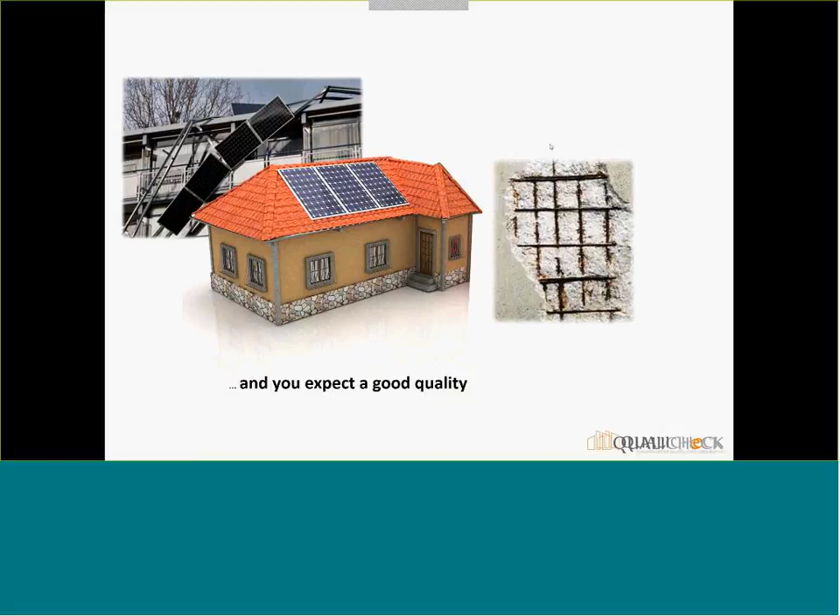It started in 2006 with level 100, and you see that in 2021, when the NZEB level has to be reached, the forecast is that it will be requirement E30. So only 30% of what was allowed in 2006.

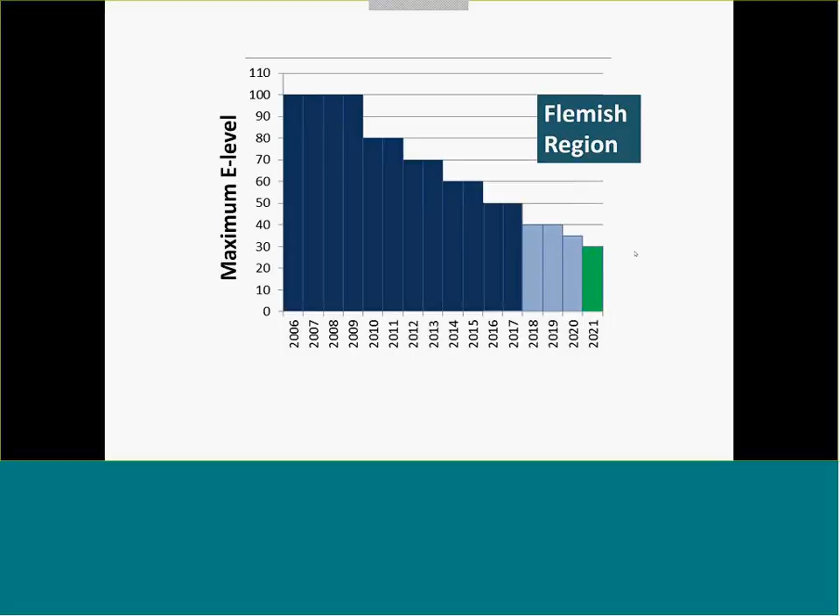But this means a lot of new technologies in terms of building shell and also in terms of technologies, and as new technologies give additional challenges for quality of the works, it's clear that good quality of the work is essential to have societal support for these requirements, but also, in terms of societal cost, we don't want a lot of cost due to poor quality.

So it's very important that all these investments are done with good quality of the works in mind, and that people are satisfied, that you have a long lifetime of the works, and also of course a good energy performance.

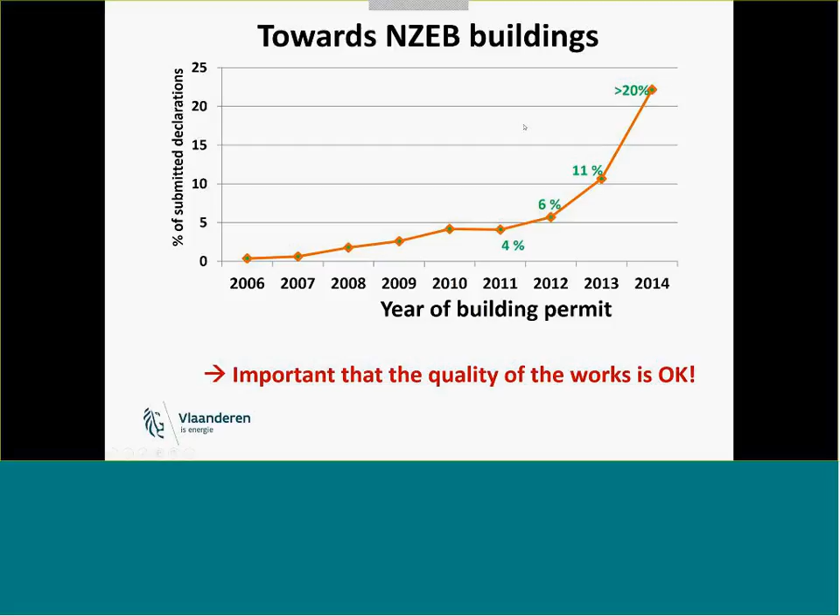So QUALICHeCK has two objectives. On the one hand, it's focusing on the reliability, the compliance of the EPC. There, what we have done over the last 3 years, and we're now at the end of the project, is set up a series of actions which should result in more attention and practical initiatives for actual compliance with the EPC, for new but also innovative buildings - creating boundary conditions so that people do what they declare, or declare what they have done, correctly.

Then the second aspect, which is closer to this webinar, is similar: a series of actions which should result in more attention and practical initiatives for achieving a better quality of the works - creating boundary conditions which stimulate and allow the building sector to deliver good quality of the works.

Now, what aspects are we looking at in QUALICHeCK? We have done a lot of work about the status on the ground, and you will hear more about it later on.

Also about compliant and easily accessible EPC input data, which is not the topic of today. Then specific actions around quality of the works, ways to improve it, collecting good examples and guidance to do better, and also compliance frameworks - identifying interesting compliance frameworks and guidance to come to effective compliance frameworks for EPC-related issues, but important for this webinar, for quality of the works related issues.

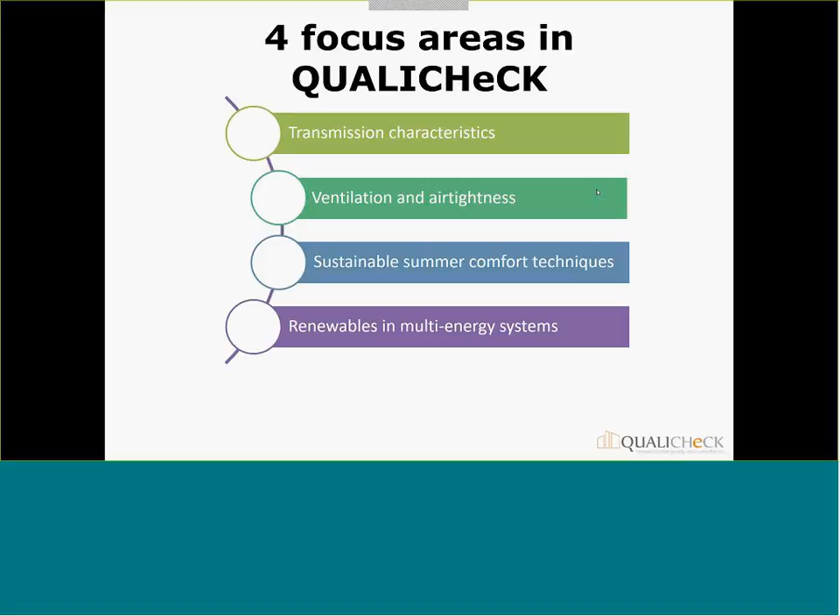In these 3 years, we have looked at a lot of technologies, but with a specific focus on these 4 areas: transmission characteristics, ventilation and air tightness, sustainable summer comfort techniques, and renewables in multi-energy systems. And we had participants in 9 countries, and these countries were selected to a large extent with the idea to have a good coverage of what you might find in Europe.

So we have big countries like Spain and France, very small countries like Cyprus. We have countries with a severe climate, like Sweden, very hot climate like Greece, Spain and Cyprus. Countries which are quite well advanced with respect to EPC compliance, other countries with already a good track record with respect to quality of the work. So that hopefully from the lessons learned we have something which is relevant for most EU countries.

With respect to the outcomes, the deliverables are basically around 3 areas: the status on the ground, interesting approaches, and guidance for improvements. But I will come back at the end of the webinar with a brief overview of all the deliverables of this QUALICHeCK project. So let's move then to the second part, quality of the works.

This is somewhat outside the focus of QUALICHeCK, in the sense that QUALICHeCK has not worked a lot itself on actions to directly come to better skills of the work, but we think there are several aspects in this part. I'll try a little bit to show the context of it.

And I use here a number of slides which were presented yesterday, because yesterday we had a meeting of the QUALICHeCK platform - slides presented by Horia Petran from Romania, who is heavily involved in a number of EU initiatives focusing on skills initiatives. I think it's good to briefly mention it here, and afterwards show where QUALICHeCK is complementary with what we are discussing in the context of the construction skills initiatives.

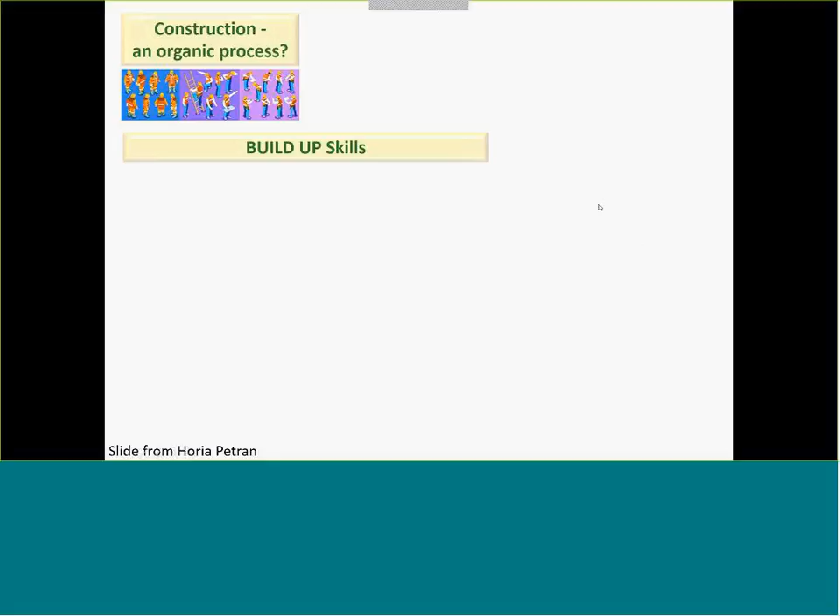It started with Build Up Skills a number of years ago, where the idea was to look at the workforce on the ground, and how we can take actions to improve the competence of the workforce.

In practice, there were what's called 2 pillars. Pillar 1 involved all EU countries and resulted in national qualification platforms and roadmaps, whereby the idea was at national level with major stakeholders to identify how to come in a structured way to better education, better boundary conditions so that the building workforce, with respect to energy efficiency and renewable energies, becomes more competent and can deliver good work. These reports you find on the BUILD UP Skills website will be integrated also in BUILD UP.

Then we had Pillar 2 with a more limited number of countries. That was a call for proposals where a number of projects passed, which is still running, shown at the bottom. For BUILD UP Skills Pillar 1, there were in total 30 reports, and for Pillar 2 there were 22 initiatives which have been running.

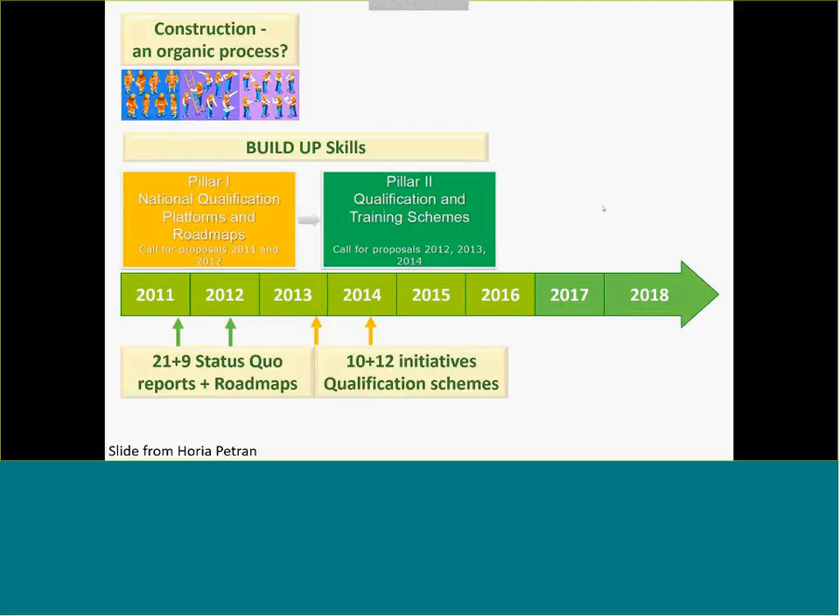This is now followed up, in the framework of Horizon 2020, by what is now called Construction Skills, with the first call in 2014, and you see there the projects which have been passed. There has also been a call in 2016 where a number of projects are, I think, in the negotiation phase or close to finalization.

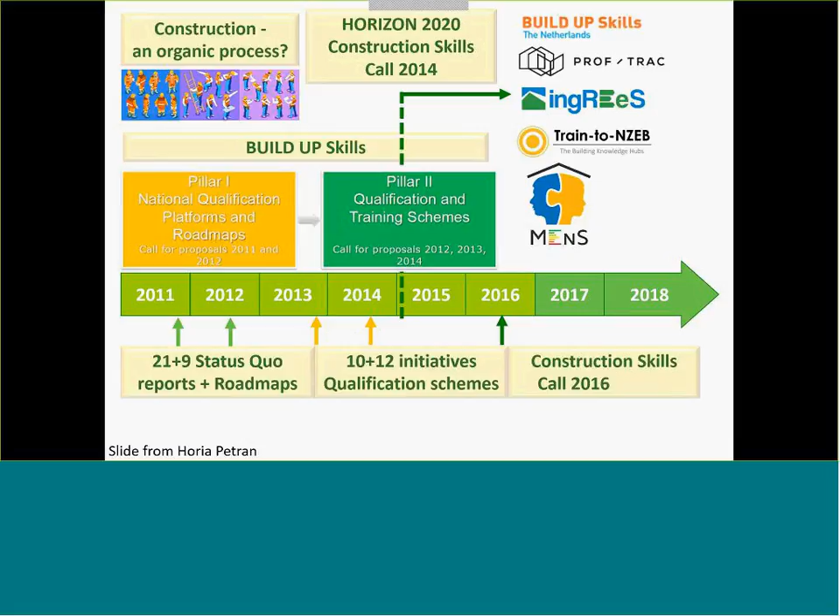Time is lacking to go into detail, but all these projects are focusing on initiatives to come to better quality of the works, implicitly assuming that afterwards this knowledge will be applied and result in better quality on the work site.

Here's just one example of a project run in the Netherlands, BUILD UP Skills advisory app, where you count a lot on the smartphone to develop applications, which I think is one of the innovative ways to bring better quality on the work site.

So that's one approach, and I think a very important one, where you say: given that there are new energy-related technologies coming into the work environment, it is important that in a structured way you try to bring more competence at the design level, construction site level, and overall improve the quality of the work.

As I said a few slides ago, as Lenin said, trust is good, but control is better. In case there are concerns that it is not sufficient to count on trust, assuming the workforce will do it correctly, it might be necessary to have some kind of control in order to check that what has to be done is done, or what has to be declared is correctly reported.

That's the third part of the presentation: quality of the works, where I think QUALICHeCK has been working a lot, with attention to this control dimension—setting up pragmatic, efficient frameworks to guarantee a high probability that quality of the works is effectively achieved. Quality control can be done in different ways.

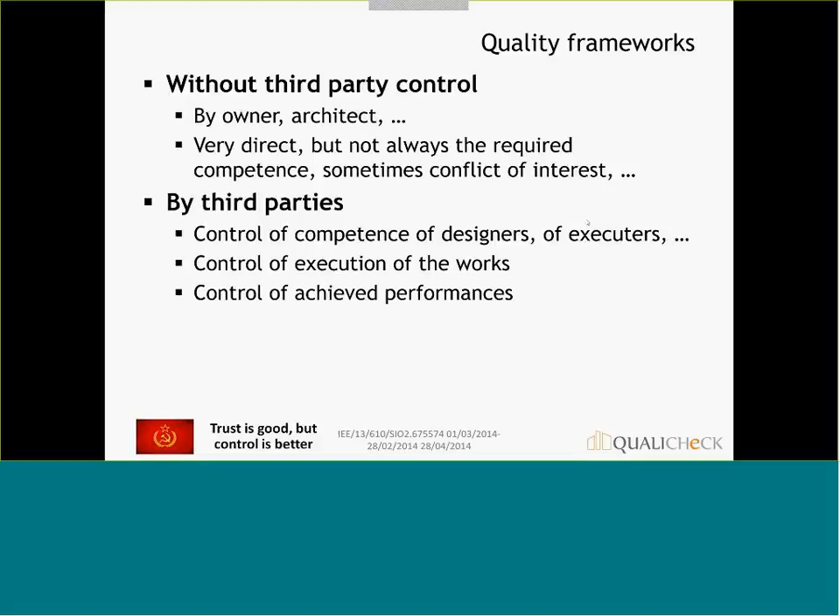So in the next few slides, I will try to illustrate that you have to really analyze case by case. Is it sufficient, or first of all, is it necessary to invest in capacity building? Is it sufficient, or do you have to combine it with enforcement schemes, or is it sufficient only to have enforcement schemes? This is illustrated step by step in the next slides.

So we are now in a context that, for new buildings, but more and more also for renovated buildings, we are confronted with cost-optimal requirements and NZEB requirements. This clearly, for a number of areas, results in the need for more and/or improved training. It's clear that some technologies applied for years, for example insulation of a cavity wall, with present requirements represent other challenges. So you have to analyze if there is a need for training and/or improved training, and then set it up as a new training option or upgrade the existing training. This is fully in the context of Build Up Skills and related activities, and also looking at new technologies like the smartphone and tablet and so on.

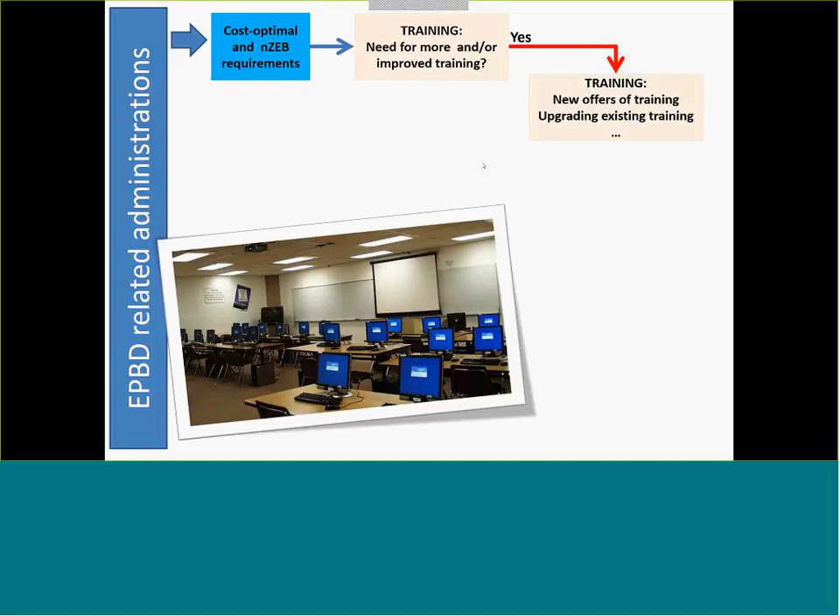Assuming that the environment is there so that people can acquire the required competence, I think the next question is: is it sufficient to count on the market itself to ensure this competence, or do you have to check in practice that the competence is there? Take, for example, the ventilation system or a PV system. Will the workers effectively follow this training, or do you need some external push to ensure they do the training, whether or not they pass an exam, so that you are sure the competence is on the market?

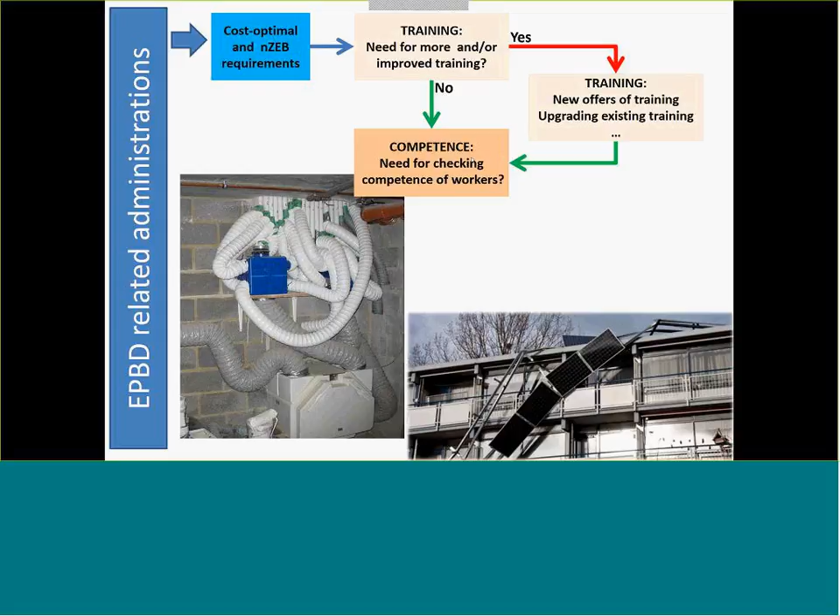If you take, for example, the area of renewables, there is a requirement in the RES directive that member states must set up a framework for the certification of installers, which means in practice that you set up a whole environment which allows certifying an installer, which in principle means there is trust in the market that this installer has the required competence. So that's typically the area of Build Up Skills, construction skills: create the boundary conditions so that you can have trust there is competence in the market.

Now this might be sufficient, but there may be cases where you need to go further. Do you need to check in practice if the works are correctly done? Because you can imagine situations where the competence is there, but because of commercial reasons or other reasons the knowledge is not applied in practice. So it's important to analyze technology by technology: is it sufficient to guarantee the competence is there, or do you really also have to do some kind of checks on site to be sure that the work is effectively correctly done?

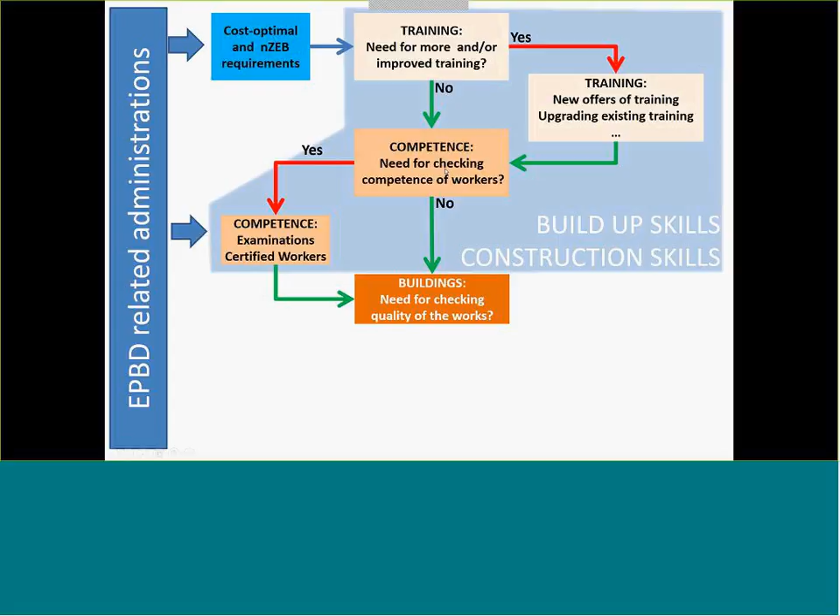I think on the one hand it can be sufficient to be sure that the competence is in the market, because people understand it has to do with stability, so really health-threatening risks. So you could say that's sufficient. Of course, if you think about the consumer, you might say, as it is so vital for the operation of the building and the risk of accidents, you might decide, even if we count on the contractors doing it correctly, to have a third-party control to be absolutely sure there is a small risk. So you have to assess to what extent it is necessary worldwide to consider a third-party control.

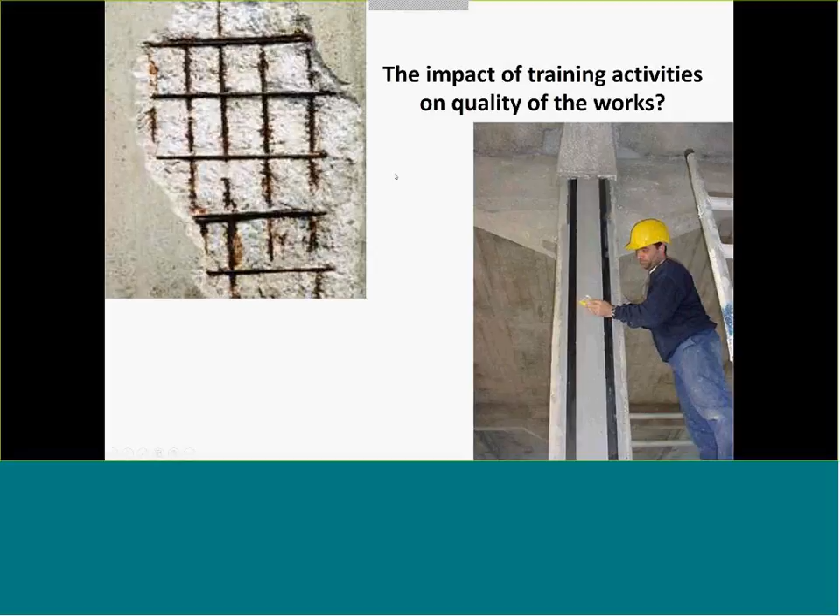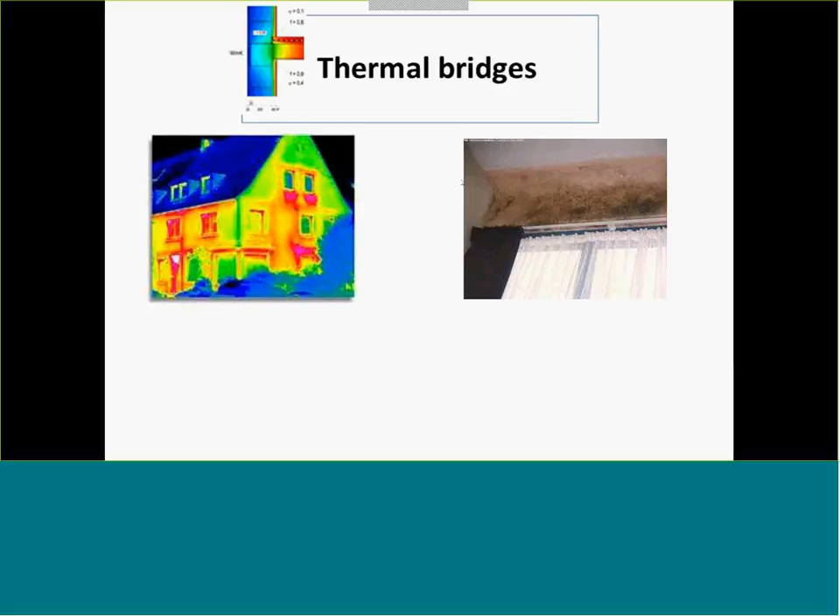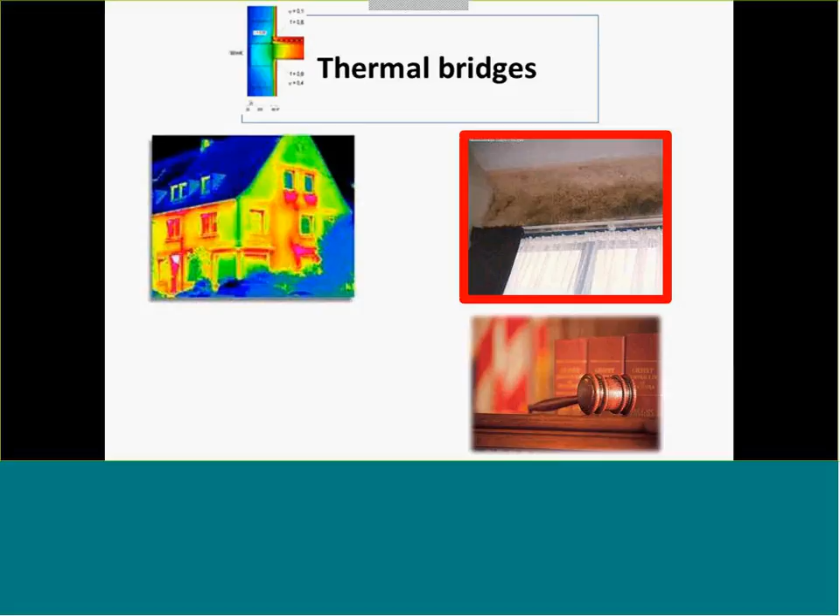Assume that you train designers and contractors for both aspects. My feeling is that for the right-hand side, risk of condensation and mold, people who understand the issue will do the necessary things to avoid it, because in case of problems, in a court case, they might be held liable. On the other hand, for the increased heat losses on the left-hand side, in practice it's not evident to assess and to really give damage where they might be responsible. So for the left-hand side, it's more important to find robust frameworks that motivate people to do the work correctly.

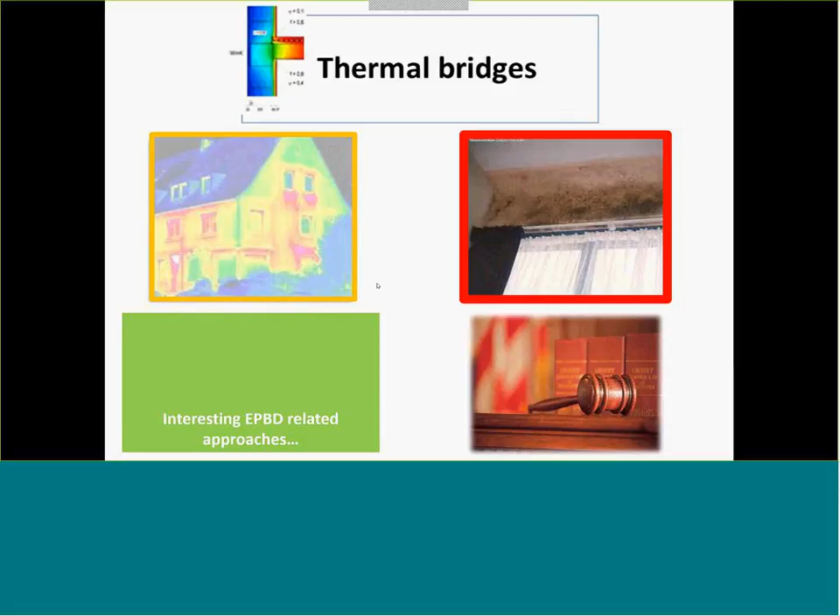We have collected, in the framework of QUALICHeCK, interesting examples in a number of countries as listed here on the scheme. So take this example of thermal bridges.

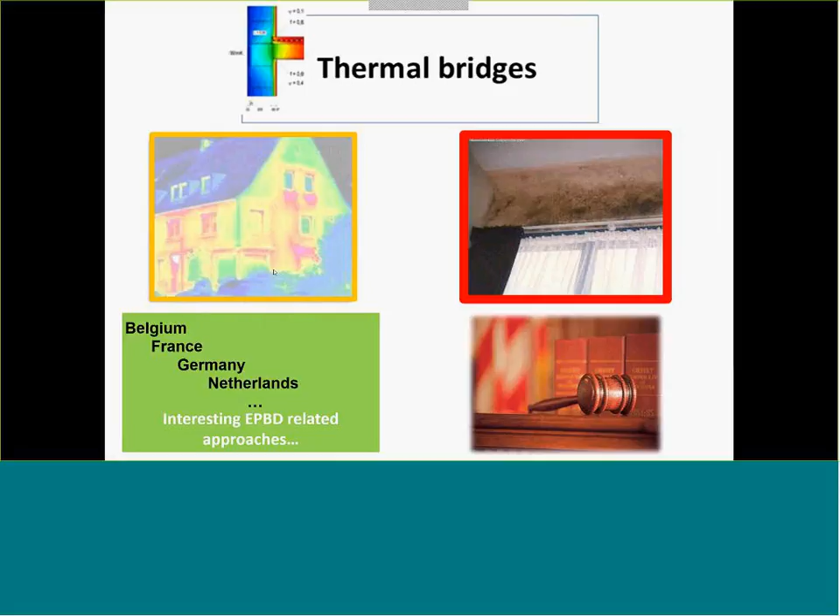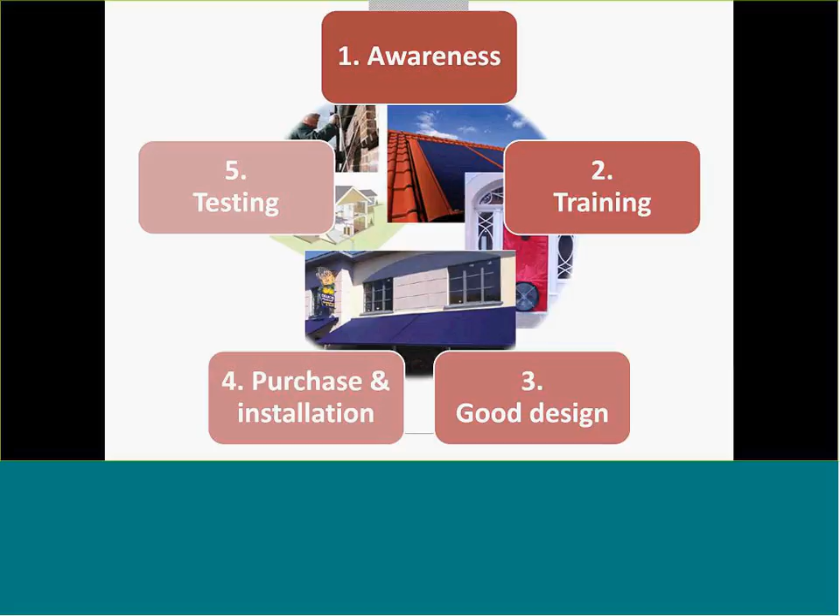Assume that you are an architect or a contractor. First of all, you have to understand what's a thermal bridge, so to understand the conditions, which requires a certain effort. You probably have to follow training, whether for better building design or assessing the thermal bridge. Typically, to avoid the thermal bridge, it might require a somewhat more complex design, and more cost in terms of material and care for execution. And once you've done your work, you still have to assess, not by testing but by calculating, the thermal bridge, which will still have a certain extra loss compared with a one-dimensional calculation. So you see it requires a lot of effort, all of it involving cost.

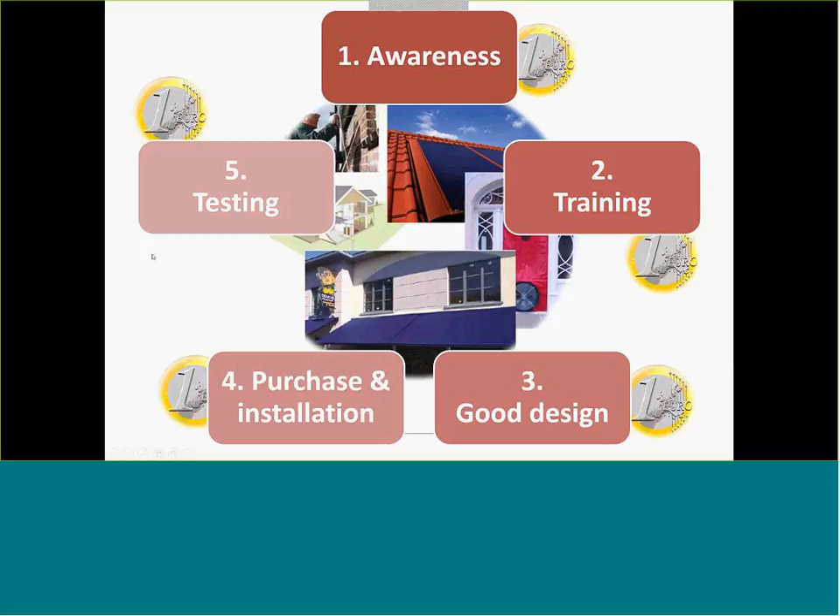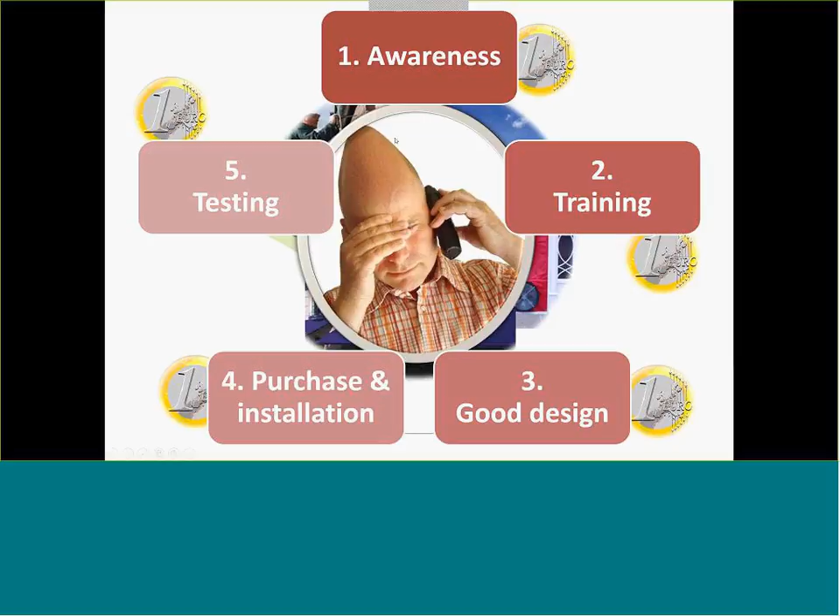And if you do your work correctly, but your colleague competitor doesn't mind at all and simply fills in at the end that there are no thermal bridges, then you are economically in a very bad situation. So whereas for condensation and mold, training is probably the most important thing to keep the problem under control, for energy loss, third-party involvement by government or others is probably quite important. You really have to see case by case to what extent there is a risk that without a third-party control, whether about the competence of the persons themselves or the work on site, you will come to acceptable conditions or not.

So what we did in QUALICHeCK, and you will hear in the next presentations more about the kind of information we collected, is to look at some of these examples and document them, to guide the reader or user towards better quality of the works.

So I come to the conclusions of this first presentation. It's clear that the move towards NZEB buildings often requires new technologies with challenges in terms of quality of the works, and this clearly requires extra efforts in terms of training and competence of the designers and the workers on site.

Secondly, better skills of the workforce are important. Investing in training and support is essential, clearly essential. Thirdly, as I have tried to illustrate, quality frameworks with third-party control are sometimes necessary to guarantee that the required quality is reached. It's surely not something you say by definition must always include third-party control, but based on risk assessment and cost-benefit assessment, there are clearly cases where a quality framework with third-party control is very, very relevant.

So that was what I wanted to present to you in this first presentation. I thank you for your attention. In case there are questions, I'm happy to reply.